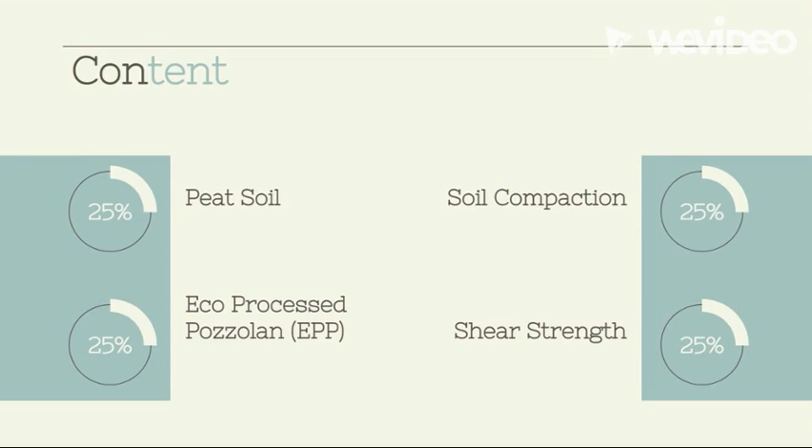The content for today's presentation is divided into four main topics, namely peat soil, eco-processed pozzolan, followed by soil compaction, finished with shear strength. Without further ado, I will jump straight into the presentation. But before we proceed to the first main topic, let me explain the abstract for my study.

Peat settlement behavior is a classic problem in construction. The dominant feature of peat is when subjected to load, it is noted for its great compressibility, high moisture content, poor shear strength, and long-term settlement. Tropical peat soils are reportedly connected with the highest settlement when loaded over an extended length of time.

Buildings constructed on peat soil have excessive settlement, which leads to instability issues like short-term and long-term settlement even under mild strain. Given current conditions, several construction projects and coastal high-rise structures, whose foundations are frequently supported by peat soils, encounter difficulties. There are relatively few historical studies in the area of peat soil stabilized with eco-processed pozzolan.

Much of the literature emphasizes peat soil stabilized with other waste materials, for instance shredded waste tire chips, fly ash, lime and so on. This study adapts the triaxial method to peat soil stabilized with eco-processed pozzolan, using a consolidated undrained triaxial cell.

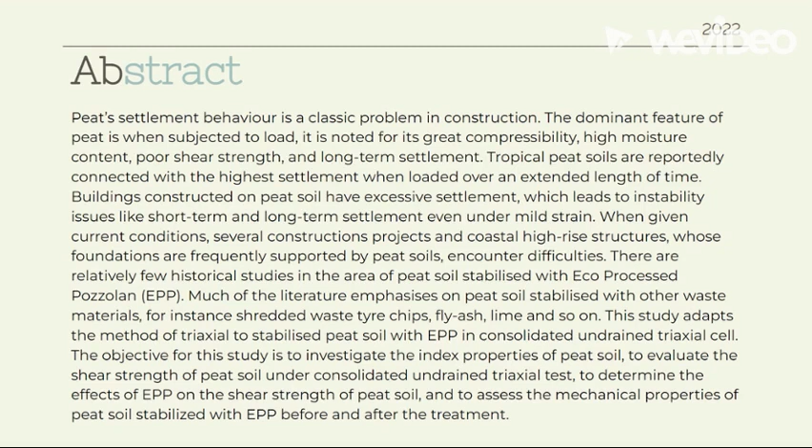The objective for this study is to investigate the index properties of peat soil, to evaluate the shear strength of peat soil under consolidated undrained triaxial test, to determine the effects of eco-processed pozzolan on the shear strength of peat soil, and to assess the mechanical properties of peat soil stabilized with eco-processed pozzolan before and after the treatment.

Next, I will explain the introduction of peat soil. In the literature, peat soil is defined as the organic surface layer of a soil consisting of moderately decomposed organic matter, primarily derived from plant material that has formed under conditions of waterlogging, depletion of oxygen, high acidity, and depletion of nutrients. Peat soil is encountered in many areas and generally originates from plant-animal remains and is considered partly decomposed biomass, as claimed by Adnan and Wijeyesekera 2007.

Peat soil is appraised as one of the problematic soils. The bearing capacity of peat soil is very low and apparently controlled by the water table and presence of subsurface woody debris, as reported by Andriesse 1998, Hashim and Islam 2008a. Excessive settlement happens when buildings are built on peat soil and thus creates problems of instability, such as local sinking and long-term settlement, even if it is applied to moderate pressure.

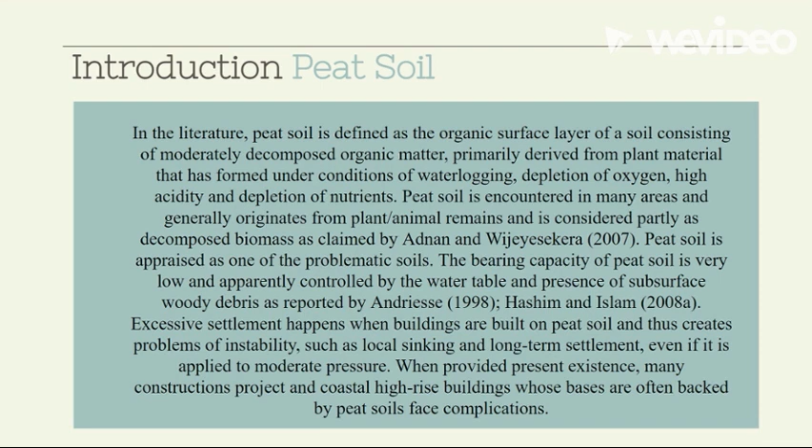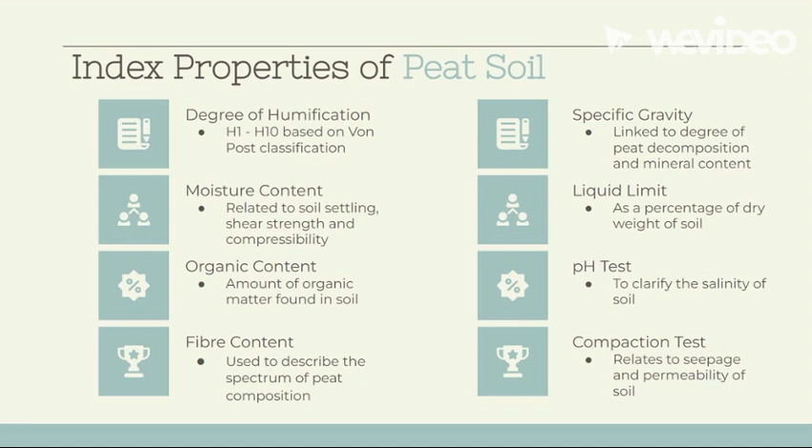Following next is the compressibility and consolidation of peat. Compressibility is the property of the soil that, under the action of an external compressive load, causes it to deform. The magnitude of a soil settlement depends on many variables, such as density, void ratio, grain size and shape, composition, and the soil deposit's past loading history.

Consolidation is the compression of wet soil under constant static pressure, which is entirely attributable to the evacuation of water from the voids. Fine-grained soils, such as silts and clays, are prone to consolidation.

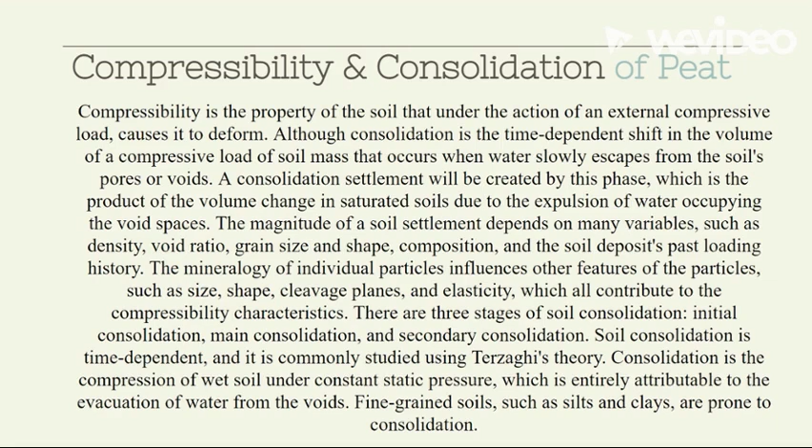Moving on to the second topic, eco-processed pozzolan or EPP. Pozzolan is a solid waste produced from spent bleaching earth, SBE, after the residual oil extraction process has been completed. Spent bleaching earth, SBE, is an industrial waste created mainly from the processing of edible oil. EPP has been used as blended cement recently. Research on EPP as a pozzolanic material from previous studies is minimal.

Waste products with pozzolanic properties are used for cement replacement in concrete, thus reducing the use of cement. The use of pozzolanic material for cement replacement could reduce the cement industry's release of carbon dioxide, CO2, because cement production contributes 5% to 7% of global CO2 emissions, in keeping with Benhelal et al. 2013. The original EPP was visually found to be mostly coarser and porous in nature.

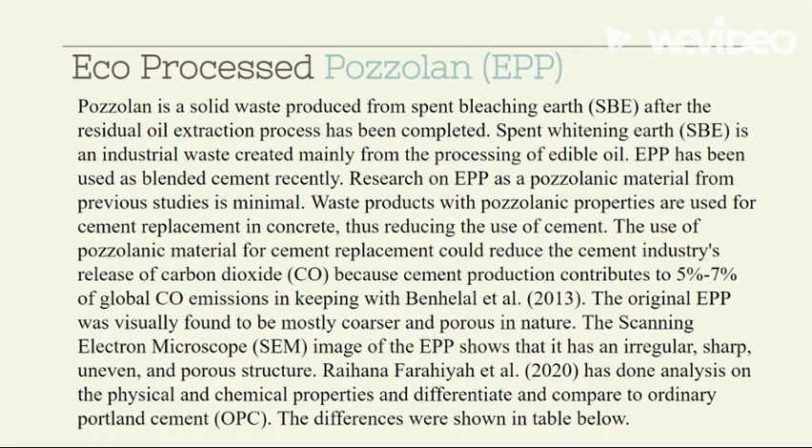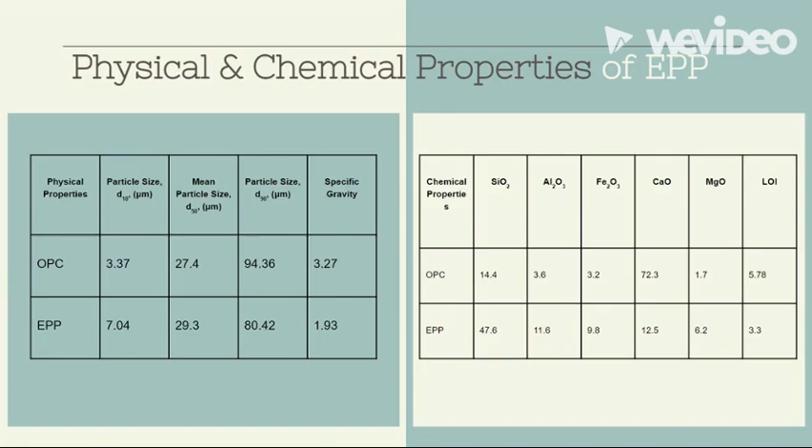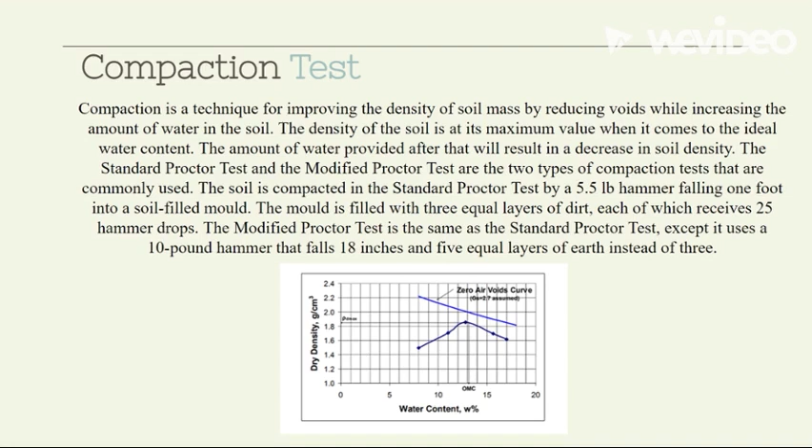For the compaction test, compaction is a technique for improving the density of soil mass by reducing voids while increasing the amount of water in the soil. The density of the soil is at its maximum value when it comes to the ideal water content. The amount of water provided after that will result in a decrease in soil density. The standard Proctor test and the modified Proctor test are the two types of compaction tests that are commonly used.

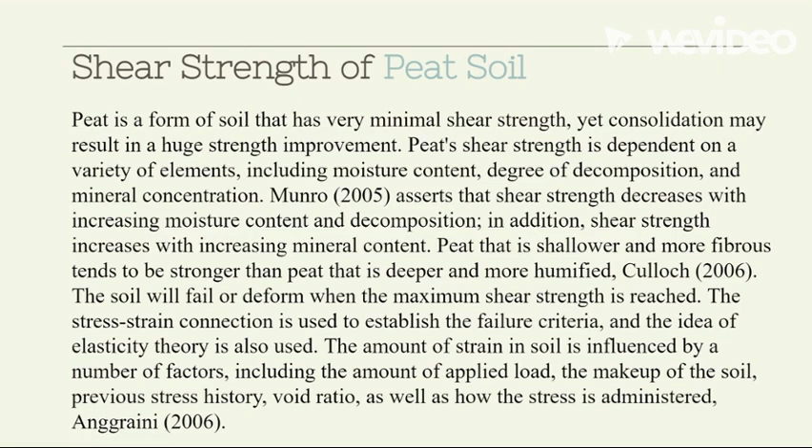Last but not least, is the tabulated peat soil stabilization method that has been done before. Most research on peat soil stabilization has been carried out with other agricultural waste and byproduct materials such as oil shale ash, pozzolanic additives, sago waste, ceramic dust, sugarcane bagasse ash and others. The vast majority of the waste and byproduct materials that have been investigated possess pozzolanic properties. Several lines of evidence suggest that natural peat soil's physical and chemical properties can be improved to gain better strength and outcome for construction. Ergo Rikmann et al. 2021 stated that Estonian kukersite oil shale, from both pulverized firing and a circulating fluidized bed incineration process, can be used as binding agents for peat stabilization.

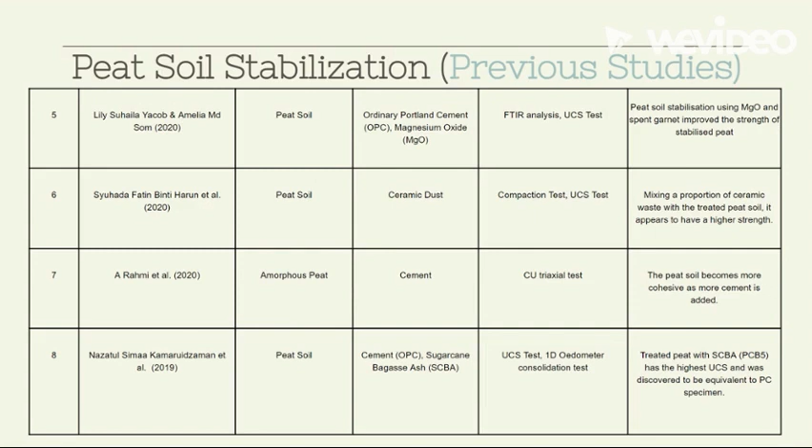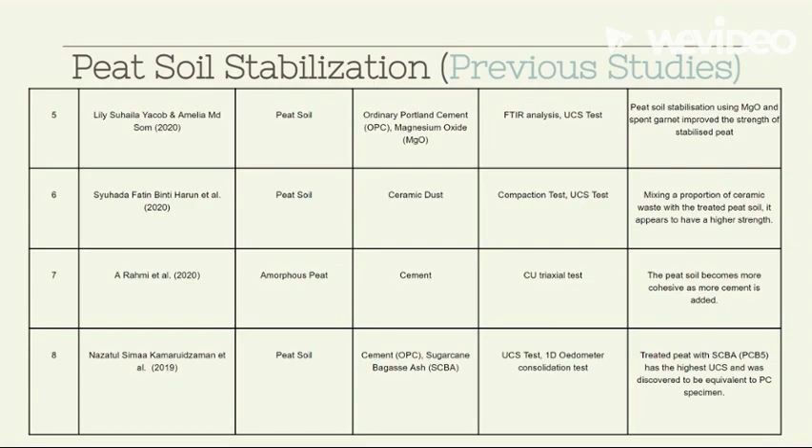A Rahmi et al. 2020 found that the peat soil becomes more cohesive as more cement is added, while Nazatul Simaa et al. 2019 identified that treated peat with SCBA, PCB5, has the highest UCS and was discovered to be equivalent to the PC specimen.

In conclusion, settlements have been reported on buildings and bridges, road embankments, dams, and several have sought to minimize these losses. In order to increase the strength of the soft soils prior to the start of such construction activities, soil improvement techniques are being implemented. Increasing strength, controlling shrinkage and swelling, controlling permeability and reducing water pressure, and avoiding physical and chemical changes due to environmental conditions are the purposes of such improvement techniques. Building on peat therefore involves a large amount of uncertainty, as all textbook theories of bearing capacity, consolidation and shear strength are based on inorganic soils.

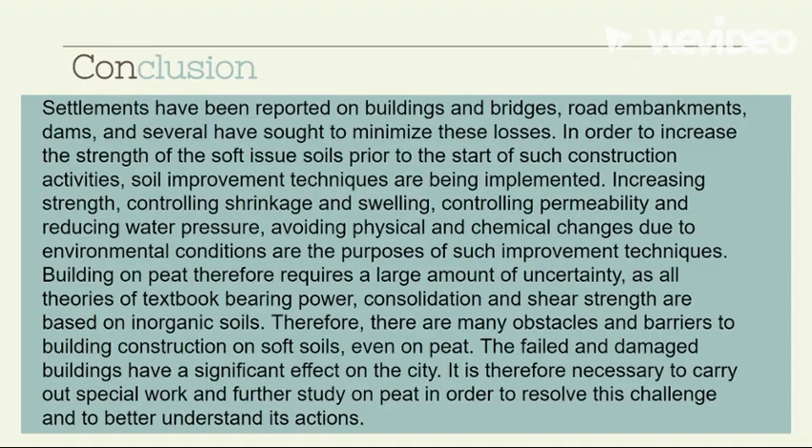Therefore, there are many obstacles and barriers to building construction on soft soils, even on peat. The failed and damaged buildings have a significant effect on the city. It is therefore necessary to carry out special work and further study on peat in order to resolve this challenge and to better understand its behavior. Attached herewith are the references I used in this presentation.